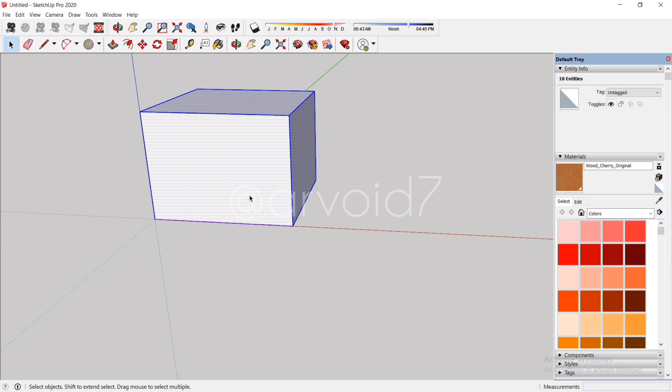Let's see how the Rotate tool works. As the name suggests, it helps rotate any object at different angles. To rotate an object, you could either first select the object and then activate the tool, or first activate the tool and then hover over the object you want to rotate. We can even have a group or the whole thing selected that we want to rotate.

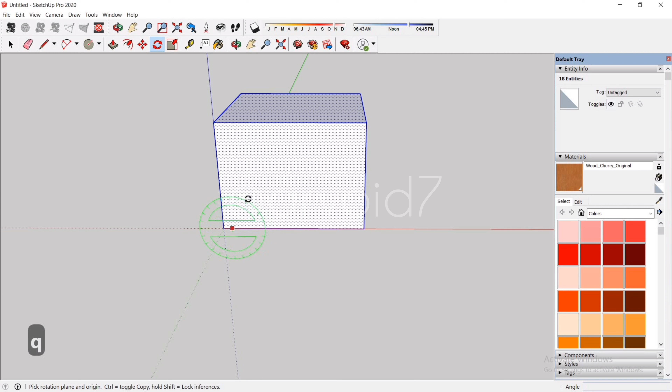So now select this whole cube, and to activate the tool, press the keyboard shortcut, which is Q, and you can see the 360-degree protractor. This will work in all three planes, and you can lock these planes to work accordingly.

For the blue plane, just press the up arrow key and rotate. For the green plane, just press the left arrow key and rotate. And for the red plane, just press the right arrow key and rotate.

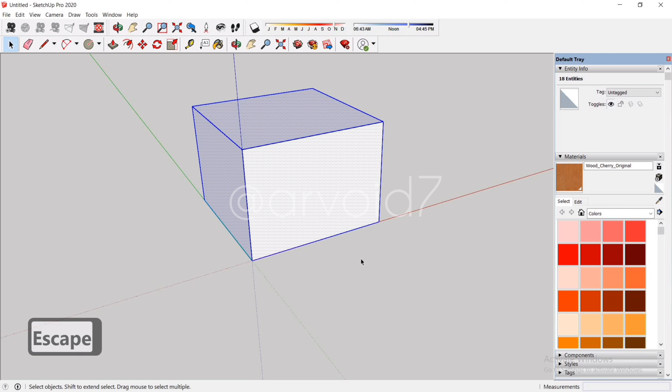You are going to click once where you want the pivot point of rotation to be. So if I wanted this box to rotate around this corner here, I'm going to select this point. Now you see this dotted line — this will be the baseline, or your 0-degree line.

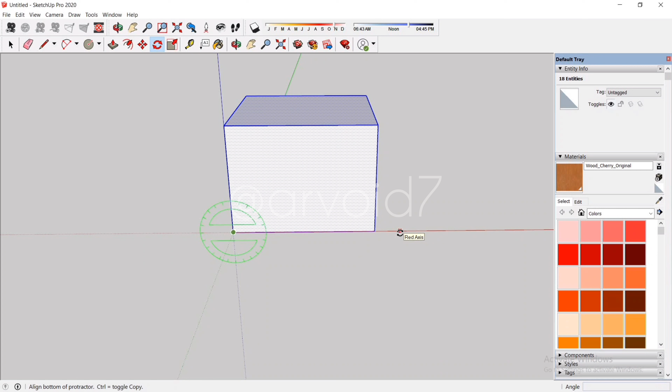In this case, I want it to be along the red axis, so I am going to click here. Once you have selected your baseline, you can rotate your object in any direction you want. Now either just randomly click anywhere, or if you want it at a specific angle, just type and enter. For example, I want it to be at 30 degrees above, so I'm going to type 30 and enter.

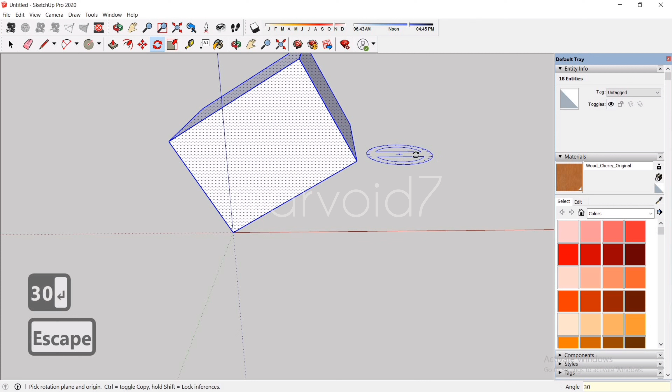If you want to rotate this object at its center, you can do it with the move tool. Just group the object and activate the move tool. When I hover over the object, you'll notice these red points appear on this face.

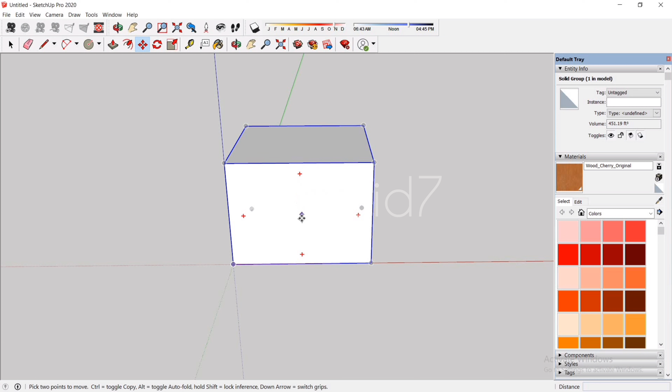Now if we go to any one of these points, we'll see a protractor appear in the center. And now if we click, we'll be able to rotate this whole cube around the center. So if I want to rotate any object from the center, I mostly rotate it with the move tool instead of activating the rotate tool.

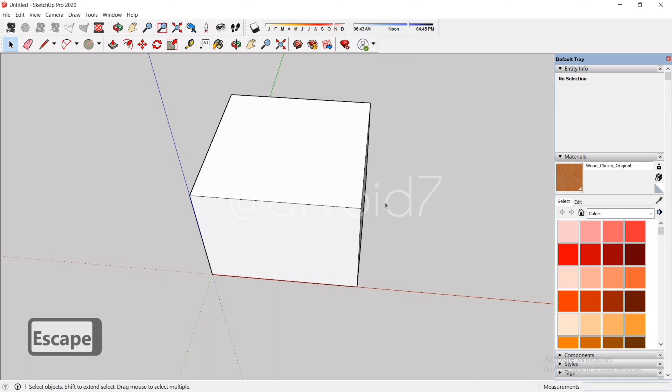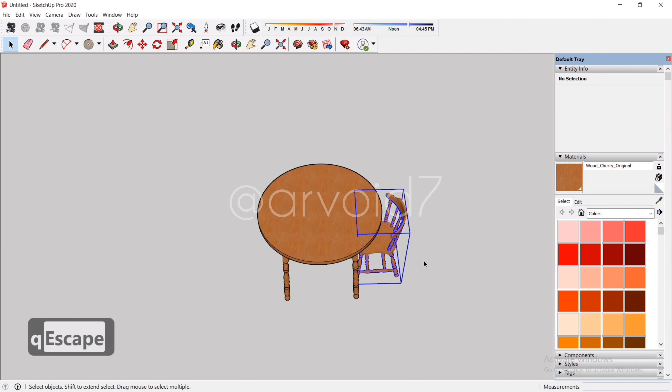I'm going to press Q on my keyboard to activate the rotating tool. So here my point of rotation will be at the center. I'm going to find the center of the table by hovering over the edges of the circle. Click in the center and set your baseline. I want my baseline to be aligned with the chair.

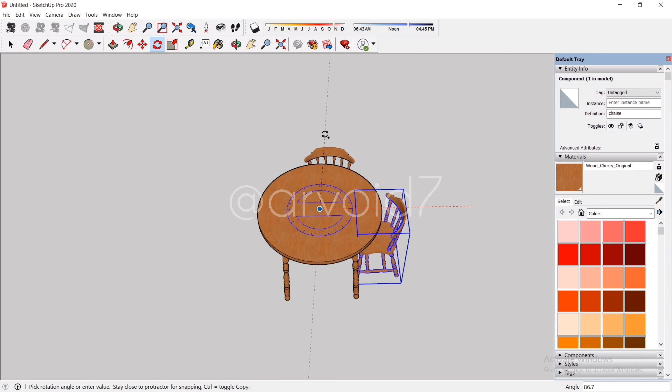Once your baseline is set, just rotate it around and press the Ctrl key to copy the chair. I want my chair to be at 90 degrees to the existing chair, so just type 90 and enter on your keyboard. And since I want 4 chairs in total, I'm going to type 3x and enter. Now you can see we have 4 chairs evenly placed around the table really quickly and easily.

Now let's understand how the protractor tool works. To activate the tool, just go to the tools in the toolbar, and halfway down we have the protractor tool.

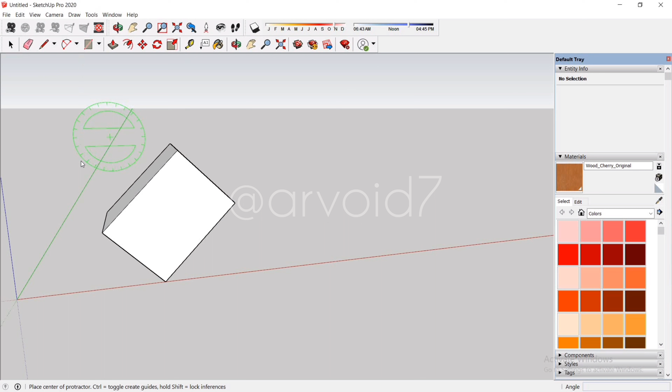Just select it from there. This tool helps you know what angle the object is in and also put in a guide. Now lock it to the green axis by pressing the left arrow key and just click at the vertex.

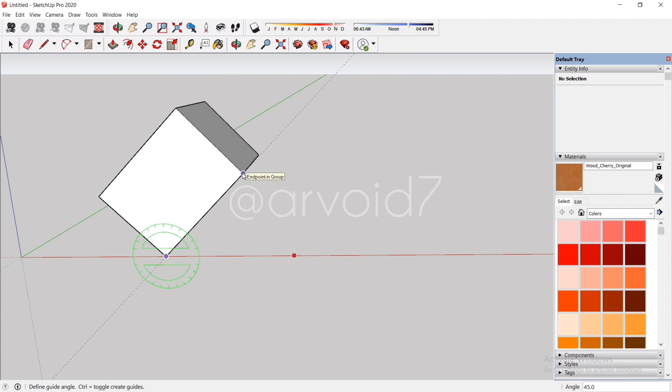Then set the base, which in this case will be along the red axis. Finally, to find out the angle, just hover over to this point. In the measurement box, you'll notice what angle it's at. In this case, it is at 45 degrees. Now if I click at this vertex here, it will give me a guide at 45 degrees.

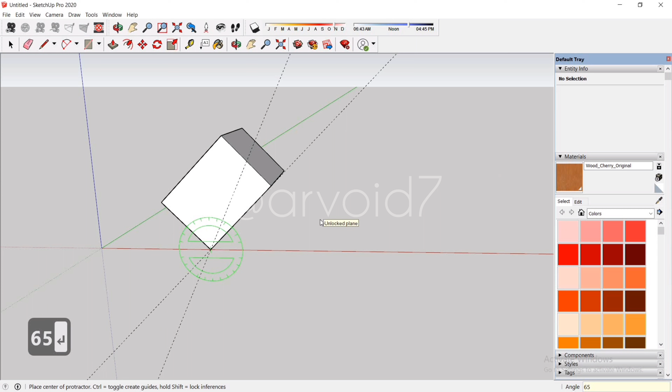Now if I want my guide to be at 65 degrees, I will lock this again in the green axis, set my baseline, and then enter 65 on my keyboard. Now this angle is a perfect 65 degrees to the red axis.

Now let's learn about the arc tool. The arc tool has a couple of variations. Let's go through each of them. The most common arc in SketchUp is a 2-point arc. The keyboard shortcut for 2-point arc is A, and this is based on using two endpoints of an arc.

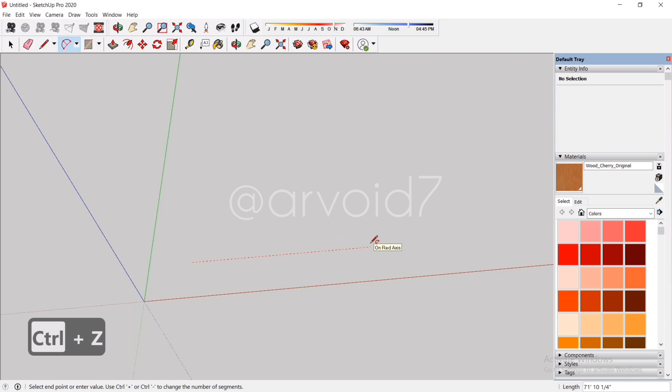So let's start. Click at one endpoint of an arc and drag your mouse in the direction you want your base of an arc to be, and click again or enter a value as you can see on the screen. Then drag your mouse outwards to create an arc, and again just click or enter a value.

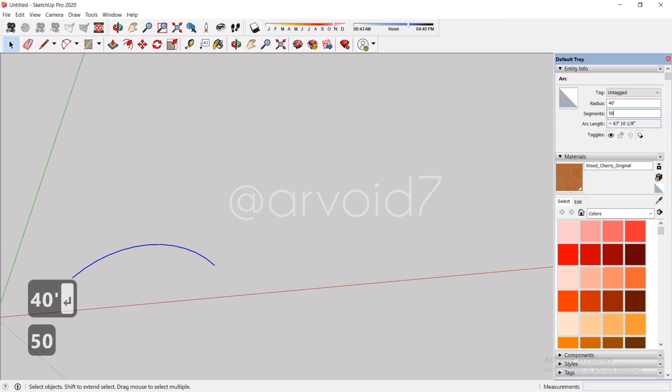You can see the arc is made up of a number of segments. To make it smoother, you have to increase these number of segments. Just go to the entity info in the default tray on your right. Here you can change the radius of an arc and also the number of segments. As you can see, as I increase the number of segments, the arc becomes smoother.

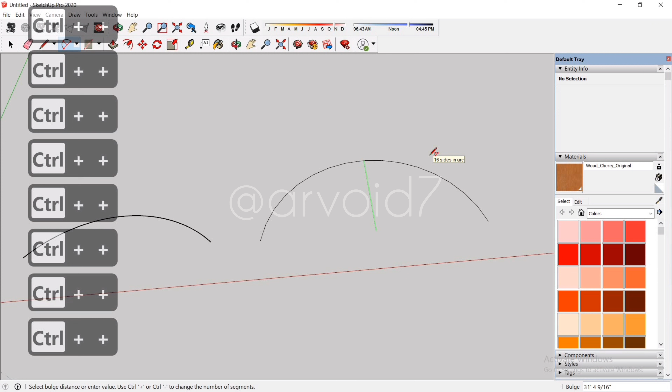There's another way to increase the number of segments while making an arc itself. So just draw a 2-point arc, and before the last click, just press Ctrl with minus to decrease the number of segments. And if you want to increase the number of segments, just press Ctrl with plus sign. Let's see other variations of arc.

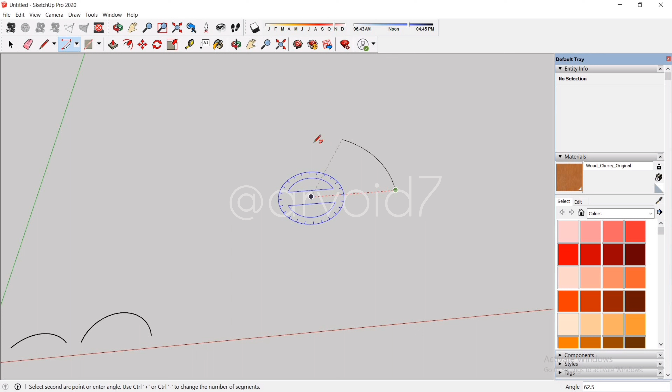Now for the most basic arc, just go to this drop down arrow and select the first arc. While drawing this arc, just think like you are drawing an imaginary circle, and this first point is the center of your circle. Then adjust the radius here either by click or by typing any value, and just sweep the arc of your circle. You can also make a complete circle with this or leave anywhere to make an arc.

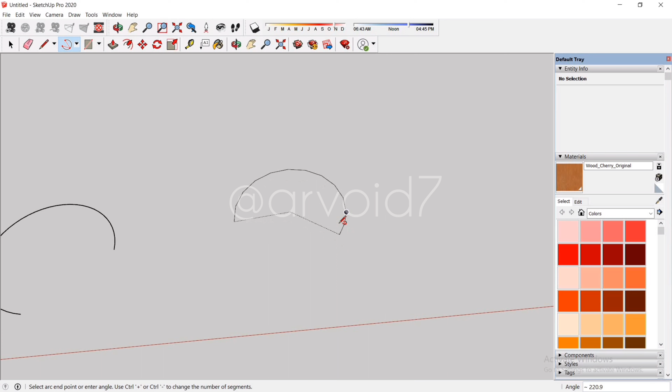Another arc is a 3-point arc. Select it from the toolbar here. Now just mark the first point of an arc. It is going to be the first end point. The next click will act as a pivot point where the arc will always go through this point no matter where you move your mouse. You can see no matter where I move my mouse, the arc will always go through this point.

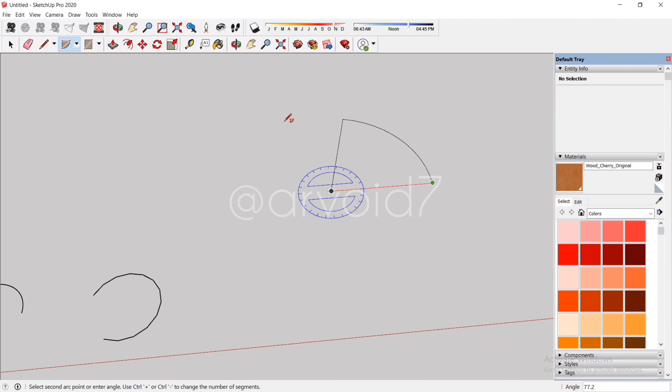And the final click will be the second end point of this arc. Under the arc list, the last option is the pie. As the name says, it will make a pie or a circle. First click marks the center, then with the second click adjust the radius. Sweep the arc around. I'm going to increase the number of segments, and the last click will be the end point. You can also make a complete circle using this tool.

That's all for today's video.